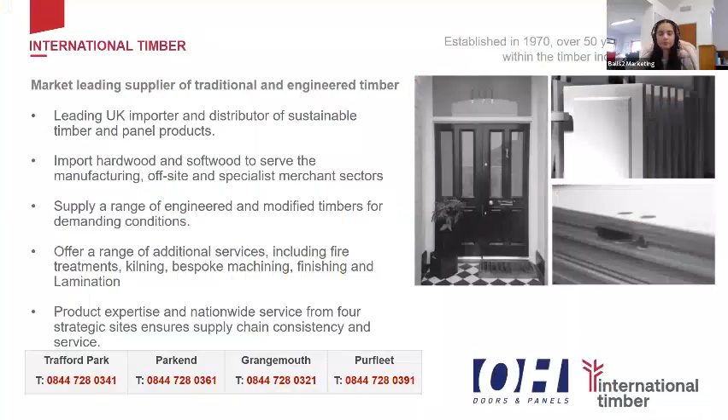International Timber was established in 1970 with over 50 years of experience in the timber industry. We're one of the leading UK importers and distributors of sustainable timber and panel products, importing hardwood and softwood to serve the manufacturing, offsite and specialist merchant sectors. We have a wide range of species available and huge stock holds, key and logistically positioned across the country to support servicing the rest of the market.

We offer a supply and range of engineered and modified timbers for demanding conditions. We're willing to work with customers on bespoke projects or pushing timber to the engineering boundaries. We offer a range of additional services, including fire treatments, kilning, bespoke machining, finishing, and lamination service.

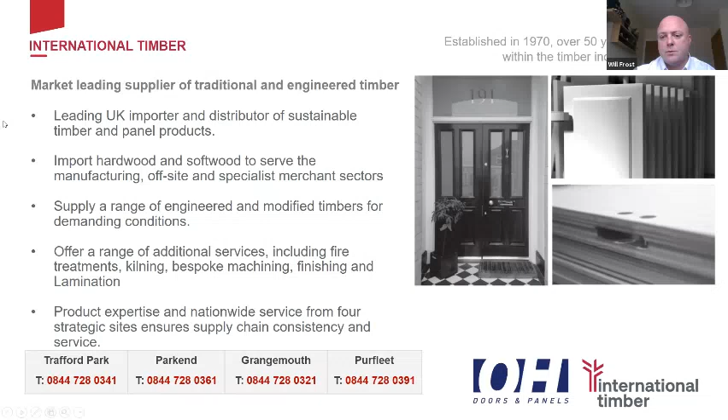Product expertise nationwide. You can pick up the phone and contact any one of our centers across the country. Numbers are always below on each and every one of these slides, which we'll share with you after the presentation. And basically, while we're involved with the OH and Joinery network affiliation, we're exclusive distributor of OH stocked products in the UK.

So we offer a range of products, which we'll cover in the next slide. We have technical support direct from OH Industries, which I'll introduce to you now, Wojciech and Jesper. They are involved in the presentation today, and for any technical questions or support we need, whether it be data sheets, documents, or even bespoke manufacturing, they're the guys that will be on hand to support us.

Within the range, we offer flush panels, raised and fielded panels, and obviously a range of bespoke sizes in terms of the OH door blanks as well.

Part of the initiative with the Joinery Network is to launch a certification program where we will work very closely with each and every one of you to make sure the product is handled within the warranty remits. Any guidelines that need to be ironed out and specified, we'll go through with you. At the end of it all, it's basically making sure you're very confident when working with the panel and also confident in the support that you will get with it.

Again, I mentioned it earlier, regional sites, nationwide coverage. That is all available on the bottom of these pages here: Trafford Park, Parkend, Grangemouth, and Purfleet.

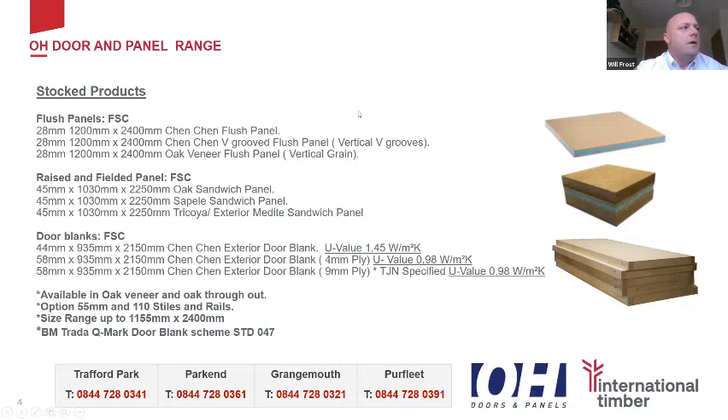So when working with OH products, they're very simple. There's no need to upgrade your tooling or purchase any specialized tooling. You can use what you have in your workshops. It's a very simple process, 5 steps.

Step 1, you cut the door to size. Step 2, you apply the cutouts for the apertures. Step 3, you can do the profiling, V-grooves, things like that. Obviously, there's some technical data around the profiling. There are certain limits within it, which we're happy to go through with you on an individual basis when we do the open door training scheme.

Then you can paint the door, prime it, paint it, fix the hardware, and there you go — your door is ready to go. So it's really cost-effective in terms of time management in the workshop.

It's an off-the-shelf product. We have these in stock, and apart from that, there's just the bespoke options, which we're happy to work with you on in terms of different sizes, perhaps different ways or grains of the veneer. We're more than happy to work with you like that.

One of the nice things about the OH slogan is one door, endless designs. And it truly is exactly that. It's a very simple product to use, but a very high quality and well-performing product in the UK market. It certainly has a great opportunity to assist any of the Joinery Network goals and visions in terms of secure by design, PAS 24. It's just an all-round great performing door blank.

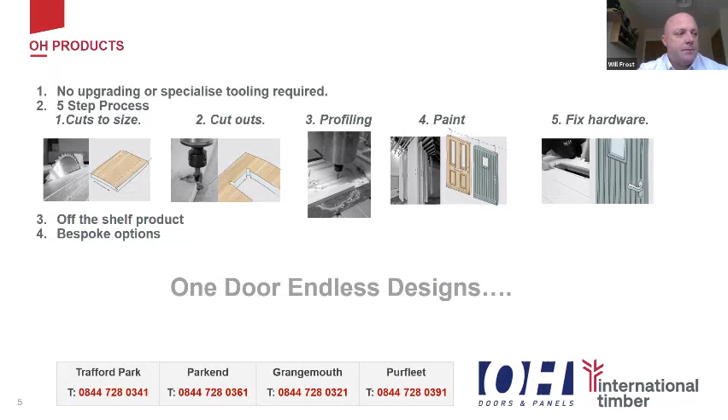And that's it really. It's a very short and sweet presentation, but it was basically just to introduce to you what we have in stock, what we have on offer. Following the slideshow, we'll start engaging with you a little bit more intimately in terms of introducing you to the training program, the Open Door Certification Scheme, and then looking forward to working with each and every single one of you in achieving your goals and helping you to succeed with your endeavors as you manufacture door products in the UK.

And that would be me. Great, thank you very much, Will.

That's really helpful. Whilst we have you on, we're really interested to know a little more about how you're driving the value of engineered timbers in the UK. I know you're very active in opening up the opportunities for this.

International Timber positioned itself not just offering engineered panel products and door blanks such as the OH industry range. We're also quite proud that about 80% of our engineered products are manufactured in the UK, which relieves the pressure of buying in bulk and committing to huge volumes and wider ranges of those products. So we're really focusing on working with joiners to find solutions that will help them succeed, and we do this by treating each customer uniquely. Whatever your range is, whatever you're trying to achieve, we can tailor our offer to help you grow.

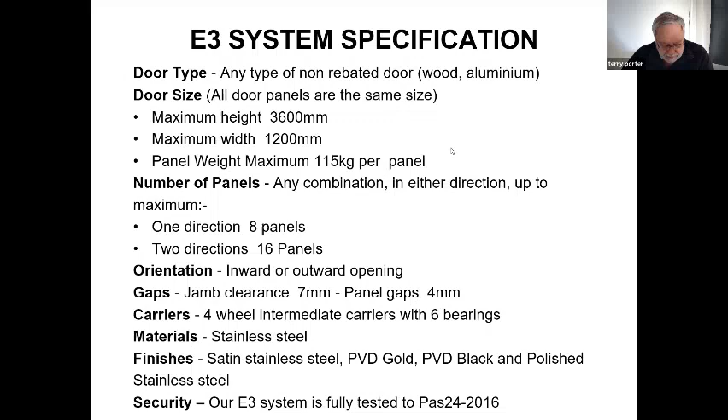Orientation: E3 can be used on both inward and outward opening doors. It's available in satin stainless steel, PVD gold, PVD black, and polished stainless steel, which matches chrome hardware.

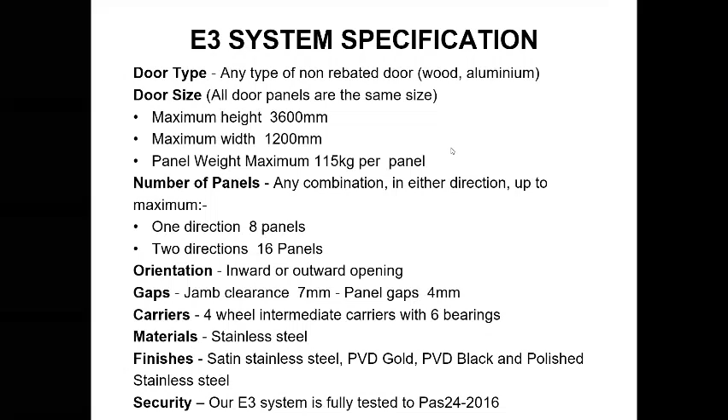The E3 system is the one that we've tested to PAS 24-2016 as well, so everything is okay on that front.

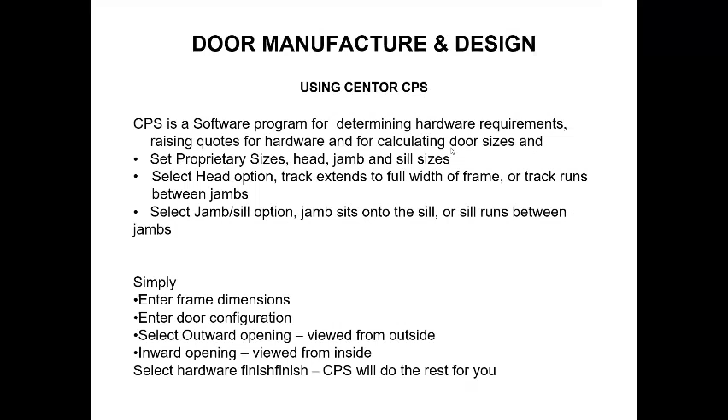Our dealers have access to our online CPS production system where they can generate quotations. The system also spits out door panel sizes for you. So if you need help with that, BJ Waller or any of our dealers will be able to help you with that.

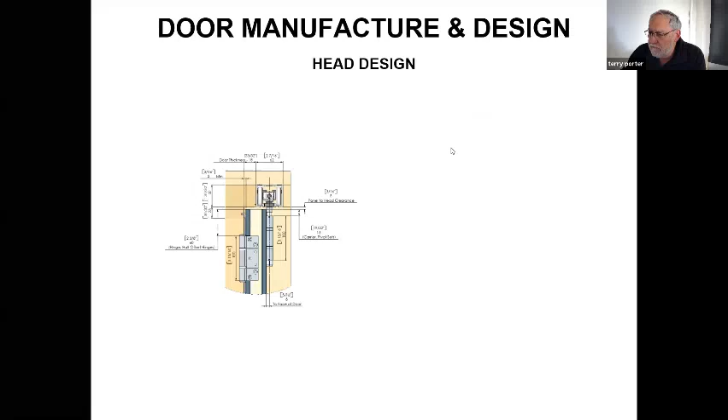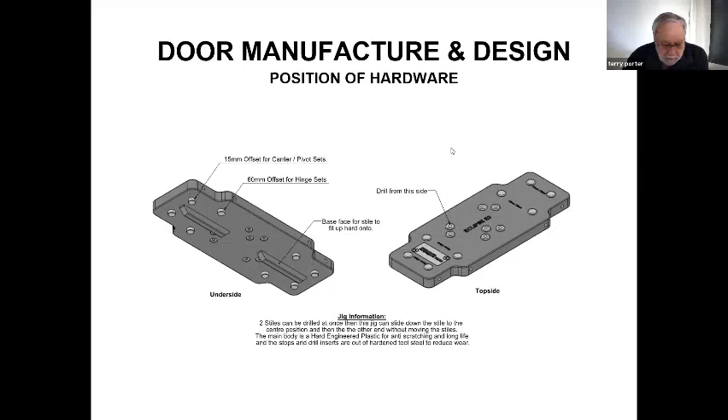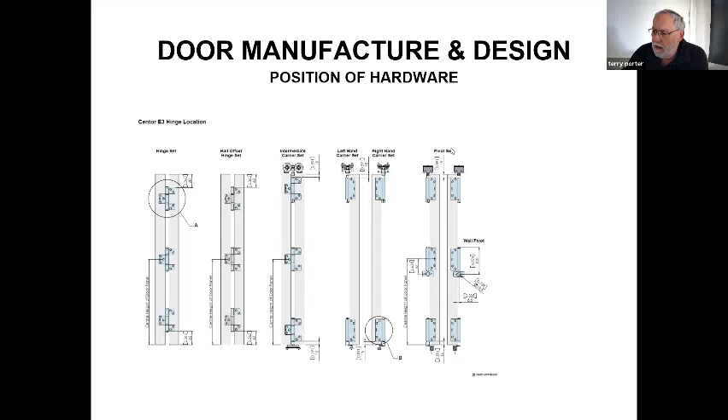We have drawings in PDF, DXF, and DWG format to help you with your design, and we offer a drill jig which helps you get the hinge locations exact. Really, it's all about making it simple and easy for joiners to make folding doors. If you're using a CNC program, we have all the information you need to write the programs for your hinge locations.

On weather seals, we recommend Schlegel seals simply because they're available internationally, so our information is relevant in all regions. If you're using these seals, or seals with similar dimensions, our instructions will show you the correct positioning to achieve the best weather performance.

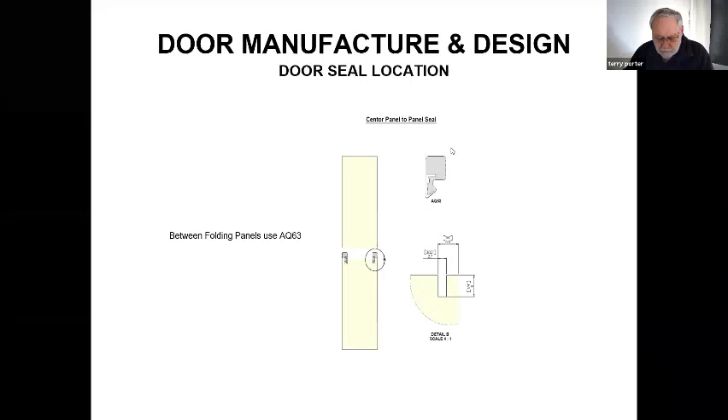Drop bolts, both keyed and non-keyed versions, are available in lengths of 200, 400, 600, and 1000 millimeters for taller doors. We offer a router bit which prepares the stile and cuts in for the drop bolt in just one single pass. We also offer a twin-point lock, which will replace a pair of drop bolts on the door with a central twist handle that shoots bolts top and bottom.

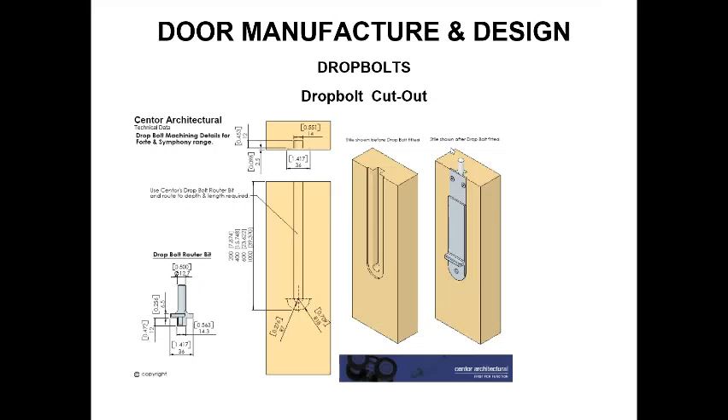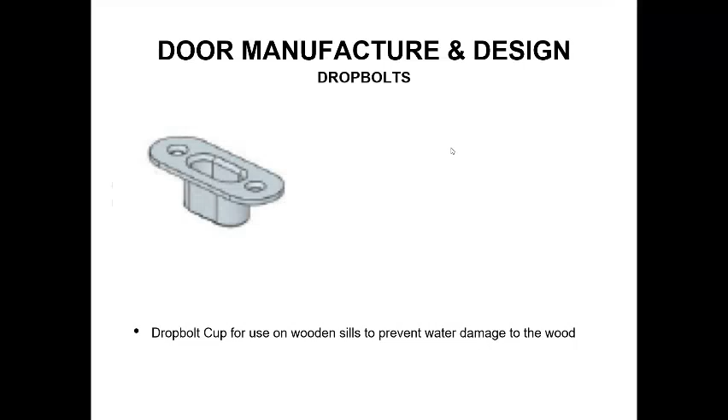We also offer a drop bolt cup for use in the sill. We recommend this to prevent water damage to end-grain timber in the sill.

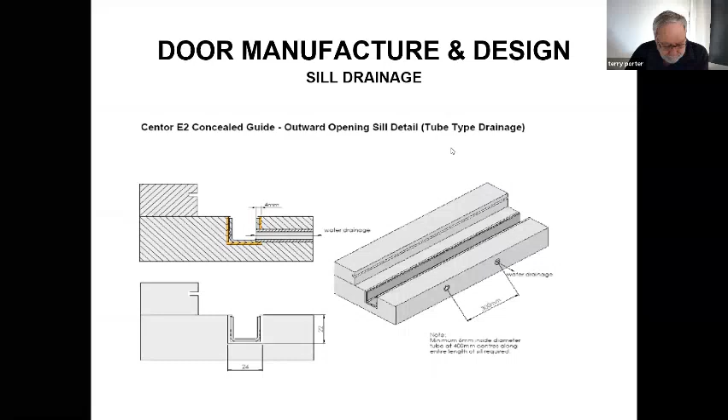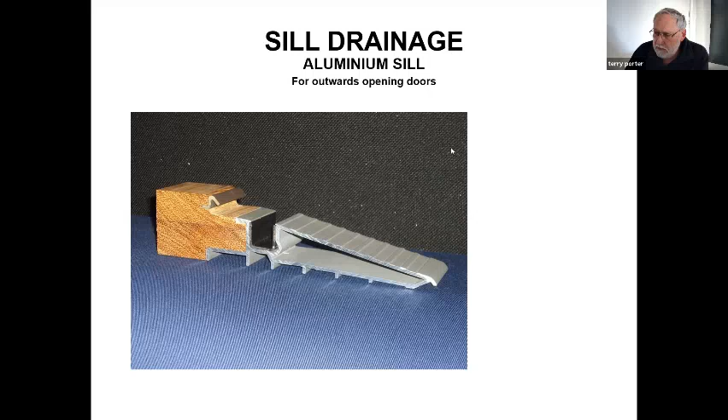Sill drainage: E2 can be used either with a timber sill or with our aluminium sill, which has a 12-degree ramp on it that satisfies the needs for disabled access.

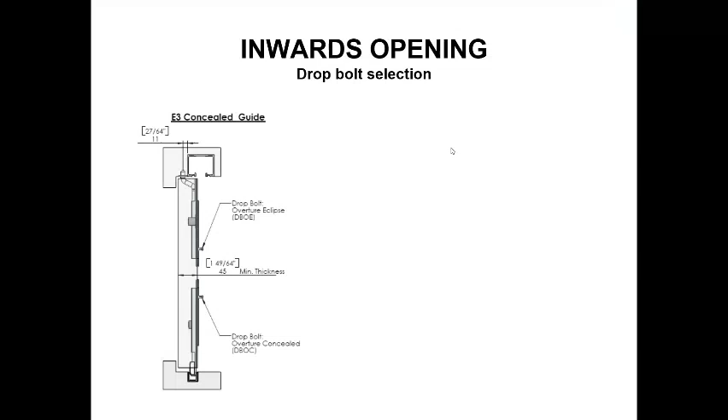On inward opening, there's a different drop bolt configuration and different handle adaptation relevant for inward opening doors. And obviously, on inward opening, you need the drainage to be to the outside.

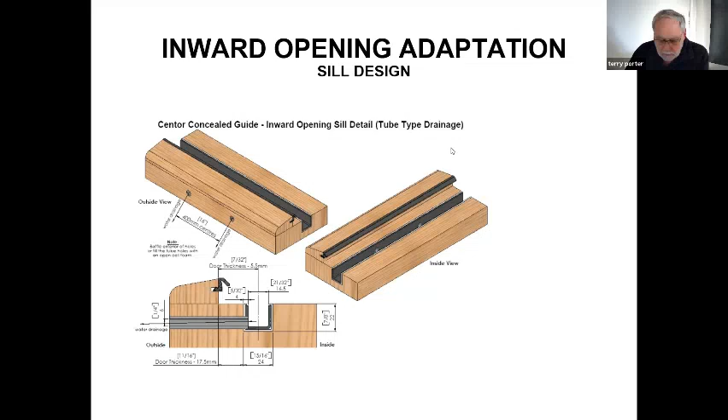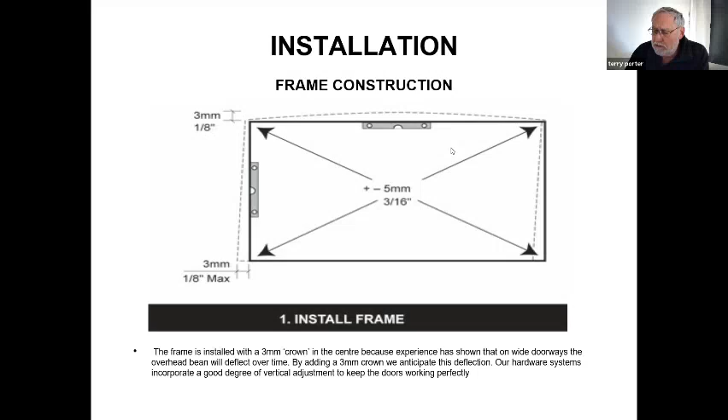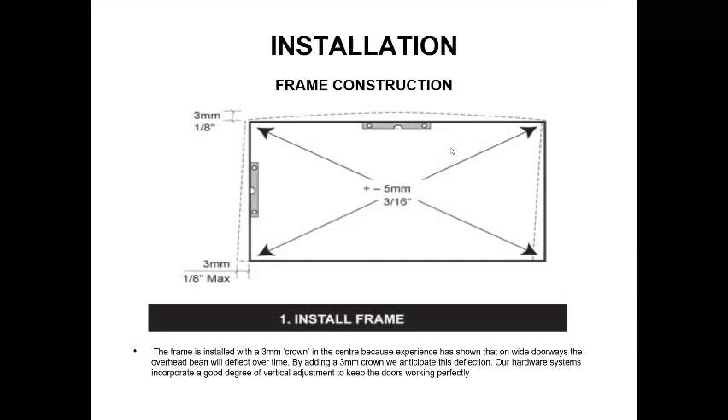Installation instructions, as well as a care and maintenance instruction and warranty document, are included in every pivot set. Every folding door has a pivot set, so they are included with every set of hardware dispatched. And we run through securing the track.

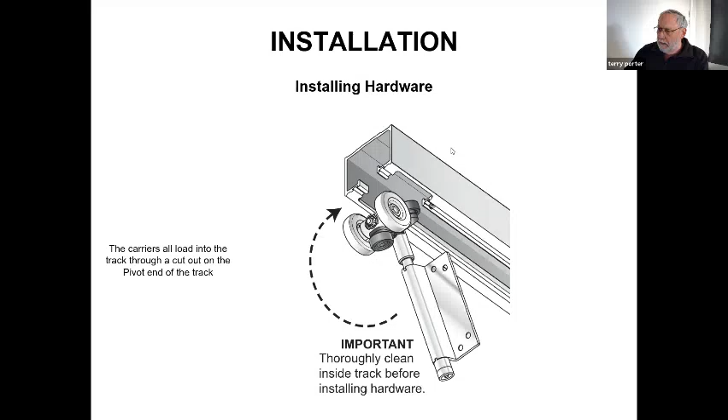When installing the hardware, there's a cutout, as you can see, on the end of every track, through which all of the hardware is loaded into the track. Once it's loaded in, the pivot secures into the end of the track, and the cutout is hidden by a stainless steel plate.

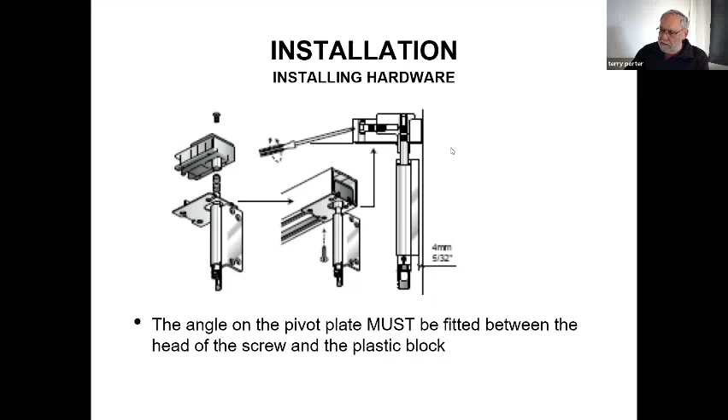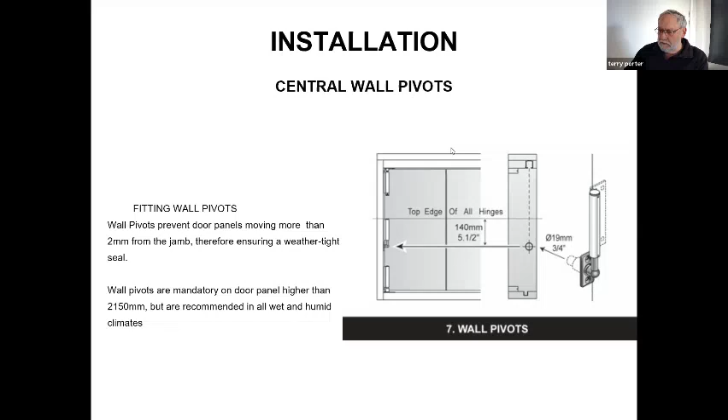We also offer a wall pivot, which is essentially the center hinge on the jamb, designed to keep the stile properly compressed up against the perimeter seal in the frame. It also offers considerably enhanced security.

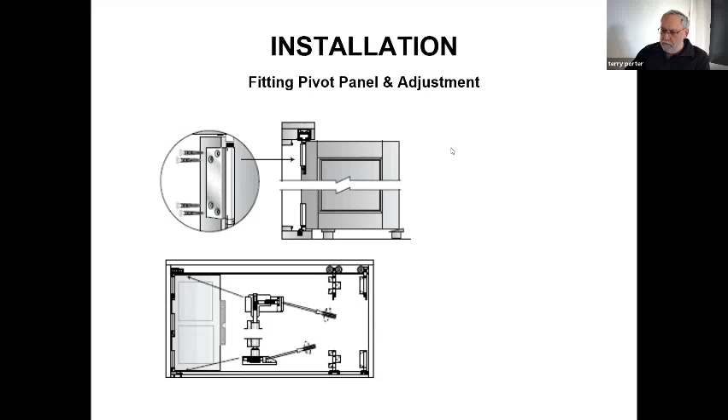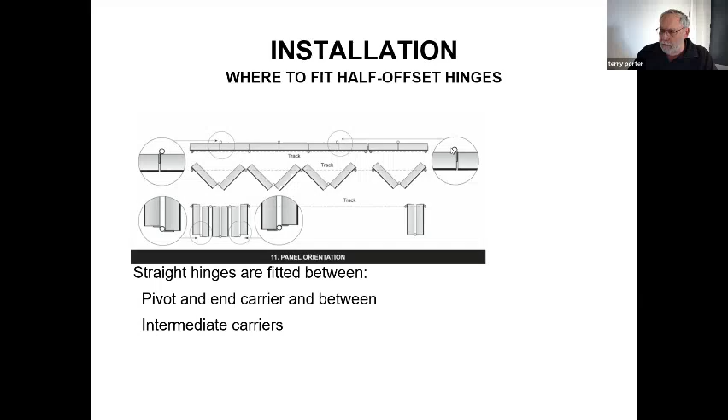Just running through the installation: install the first panel, level it up, and then hang the further panels. The reason we have an offset hinge is to correct the geometry so that all panels are the same size. The explanation and instructions for that half offset hinge are included in the box with every set of half offset hinges to help with the correct application and orientation of the hinge.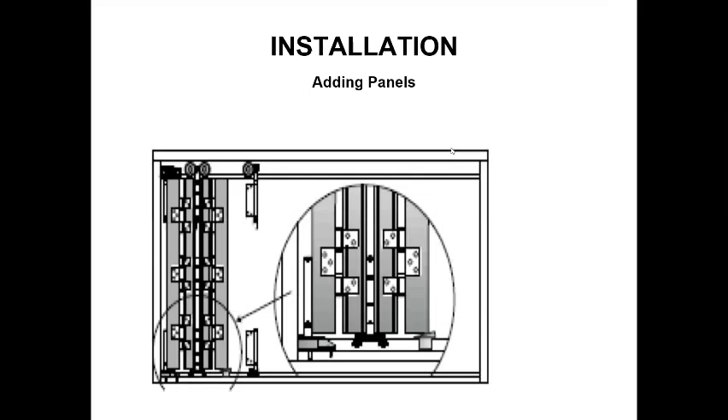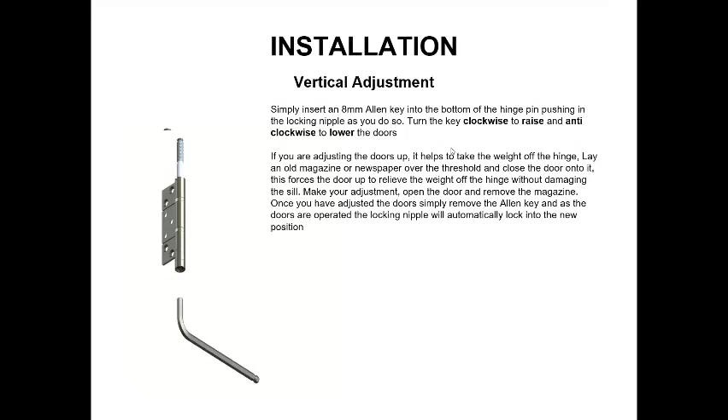One of the really standout features of our systems is not just the fact that there is adjustment, it's the degree of adjustment and the simplicity of the adjustment. We found that it's been designed so that adjustment, which becomes necessary over periods like this when we have some dry weather, we wish.

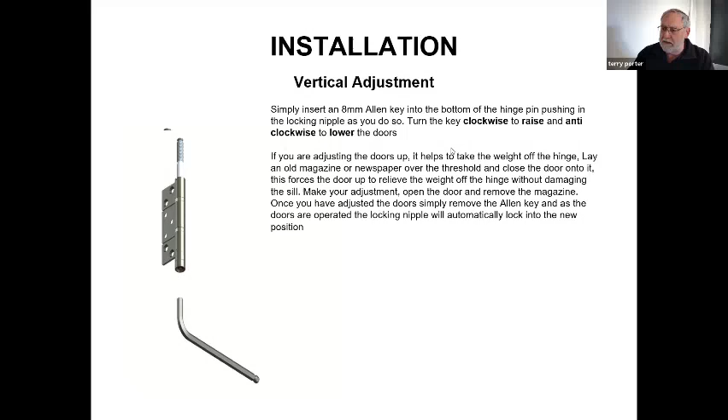Often there'll be a small adjustment needed on the door, and rather than having to go out to site to make that adjustment, it's been designed so that it's really simple and easy and can be achieved by the homeowner. Experience has proven that it is really that easy for the homeowner to adjust the doors.

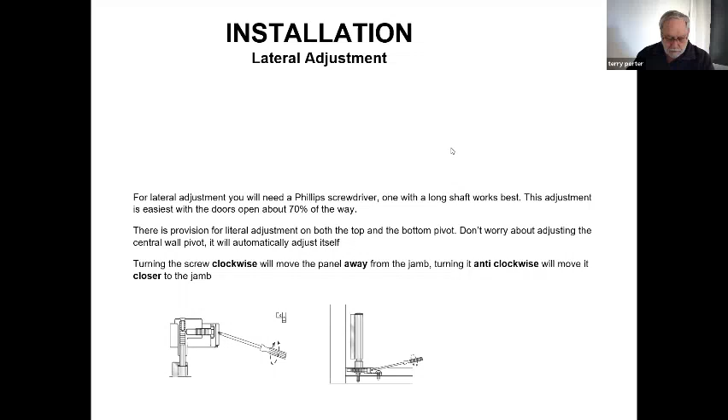I touched briefly on our CPS system. It's a really great online system which our dealers have. They can simply enter the frame width, frame height, configuration of the doors, such things as hardware color, drop bolt choices, and so on, and it spits out a quote.

Once you've settled on the quotation, you can go back into that quote at any time while it is still a quotation on the system and edit it to change hardware colors, etc. Once you settle on the criteria, a simple click ensures there are no errors in transferring from a quote to an order. The system works really well. And that, gentlemen, is it.

We did touch briefly on our screens. It's worth looking at our website for this. We have a screen system, our S2 and S4 screen system, which puts an insect screen, and in the case of the S4, an insect screen and or a blind instead of a curtain across wide openings. Experience has shown us that in our home market in Australia, people buying doors would approach a door manufacturer or joiner, and would expect that joiner to offer a screen for the doors because every door in Australia has a screen on it.